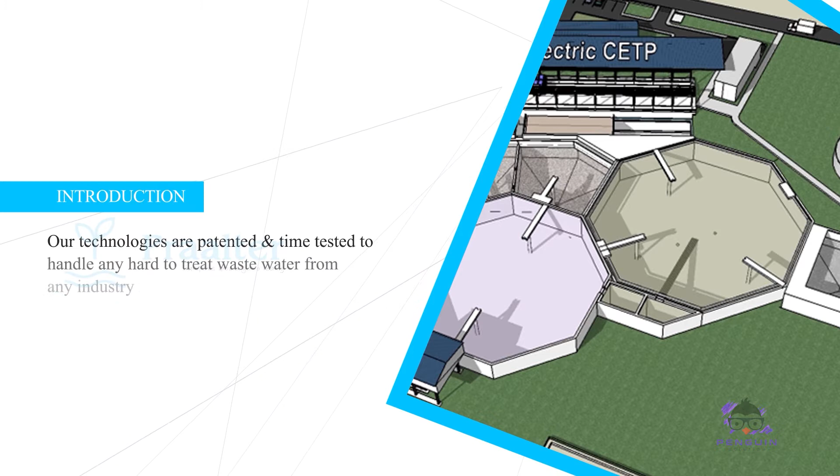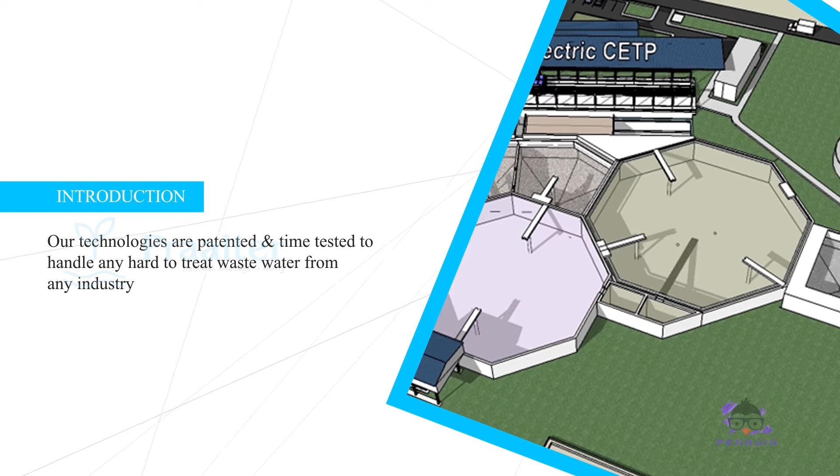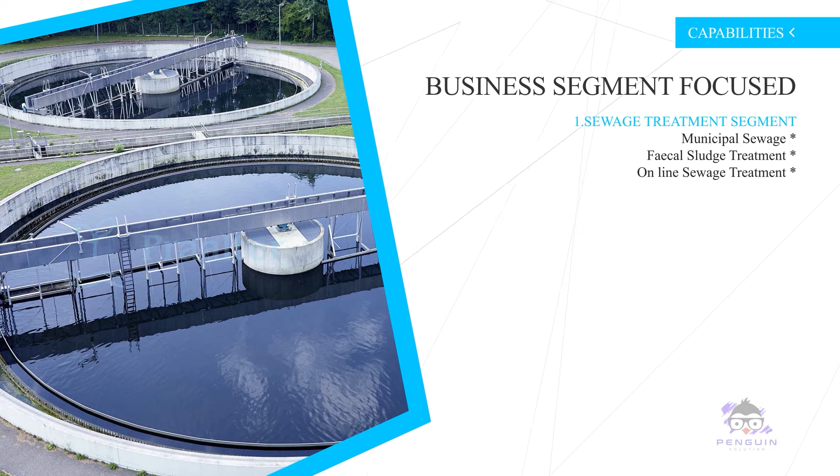To start with, we will be targeting our technology in three segments: one, municipal sewage treatment; two, industrial wastewater treatment; three, domestic water.

In municipal sewage treatment, besides the municipal sewage treatment facility mostly run by the government, in view of the capital expenditure and terrain constraints on the government in sewage networking, we anticipate more emphasis will be laid on FSSM septage management and online treatment. We are ready to meet such business opportunities.

We have experience and expertise in treating and recycling industrial wastewater, and have executed projects with capacity of 60 MLD elsewhere in other parts of the world, when associated with our technology partners.

Our expertise includes industries like textile, tannery, food, common domestic waste and industrial waste, food and beverage industry, chemical, oil and gas, and so on.

Electrocoagulation is a chemical-free process destabilizing the suspended solids, emulsified or dissolved contaminants in an aqueous medium, by introducing electrical current into the medium, which provides electromotive force causing the chemical reaction.

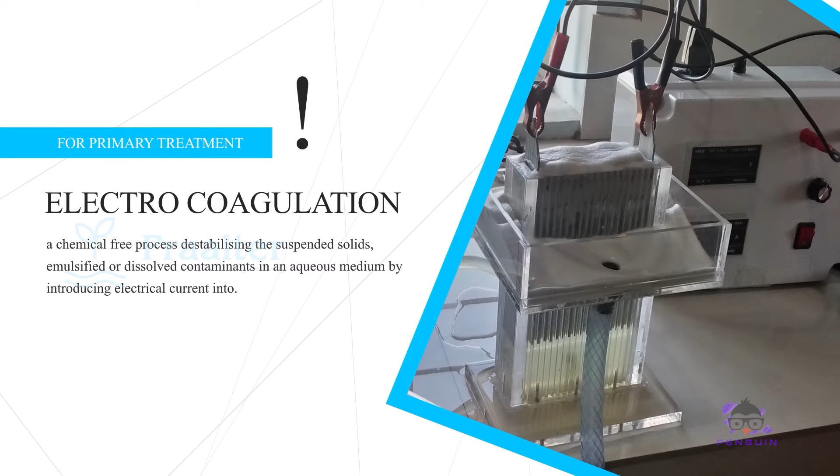It consists of three components: one, power source; two, reaction chamber; and three, electrodes.

When wastewater flows through the EC reactor, multiple reactions take place. First, on the surface of the anode, metal ions are driven into the water. Secondly, on the surface of the cathode, water hydrolyzes into hydrogen gas and hydroxyl groups. Third, electrons flow freely from cathode to anode, which destabilizes the suspended solids and emulsified oils.

As the reaction begins, metal ions complex with hydroxyl groups and form large flocs which consist of metal and other components. Suspended solids and emulsified oils are readily entrained into the floc because of their destabilized surface charges. Finally, hydrogen gas bubbles separate and lift the floc to the top of the reactor. This cooperative action makes the process easy, effective and efficient.

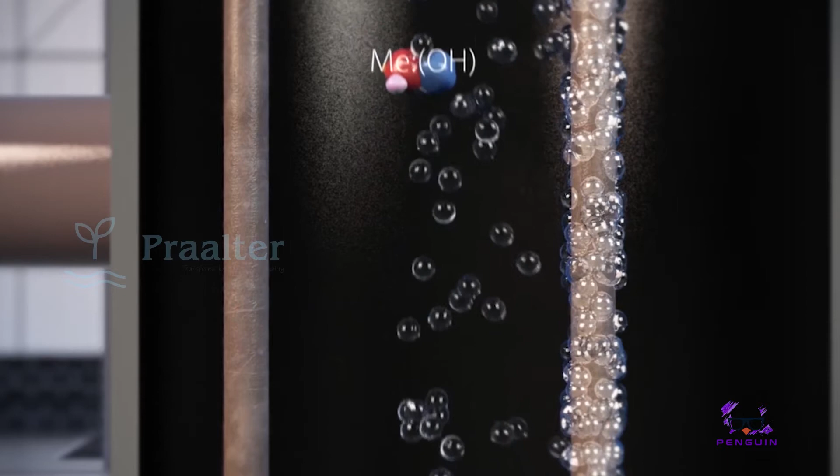As the water leaves the EC system, it enters the secondary separation tank. Here, the effect of the EC reaction is further accelerated. The floc generated in the EC system reacts with itself and forms larger flocs that settle out separately in the water column. Finally, the water leaving the settling tank is fed into a filtration system using silicon carbide membrane for ultrafiltration, and an RO membrane process as the design warrants.

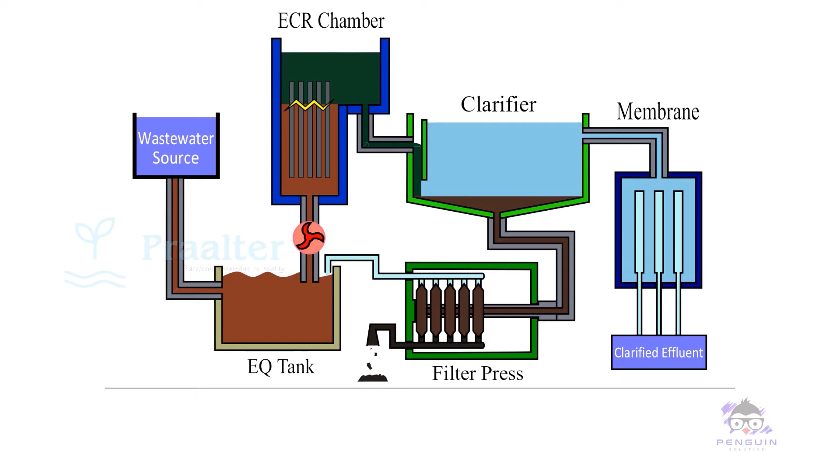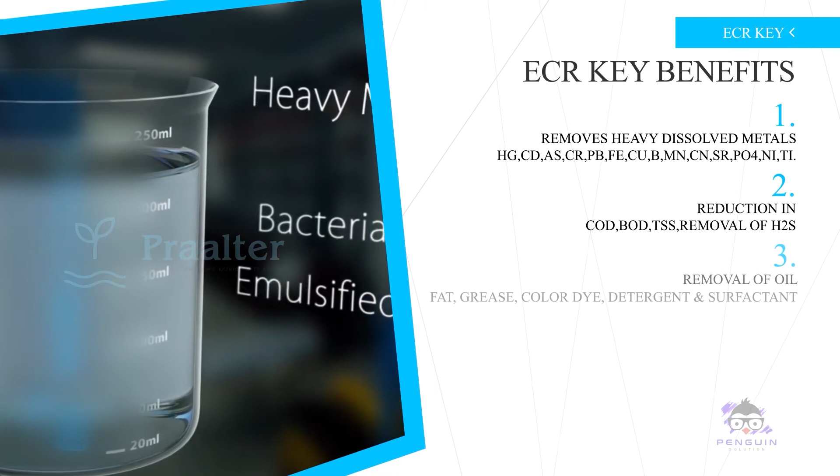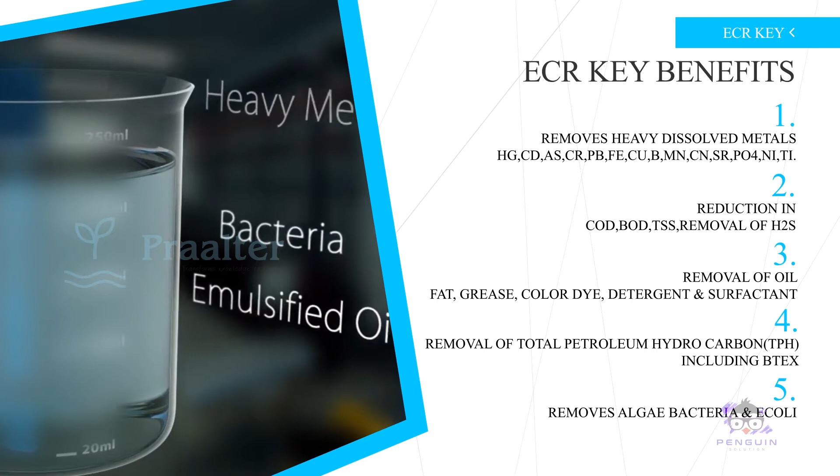The key benefits are: removes dissolved metals such as mercury, cadmium, arsenic, chromium, thallium, lead, iron, boron, copper, manganese, cyanide, etc. Reduction in BOD, COD, H2S and suspended solids.

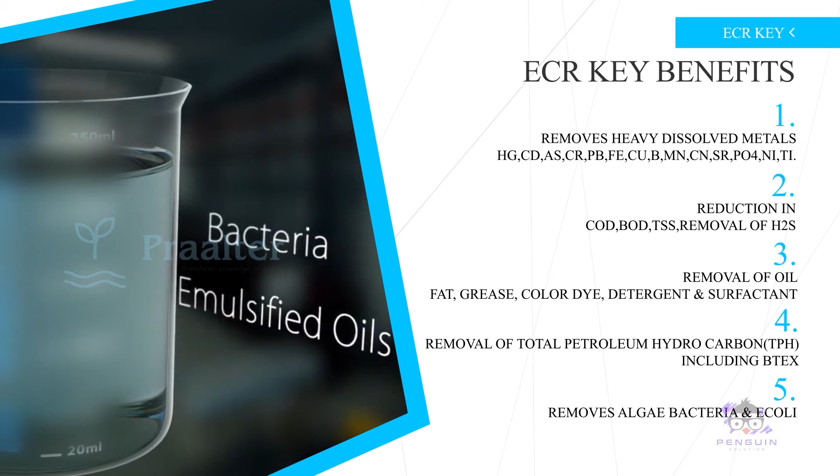Removes color dyes, detergent, surfactant. Removes total petroleum hydrocarbon. Removes bacteria, viruses, algae and E. coli.

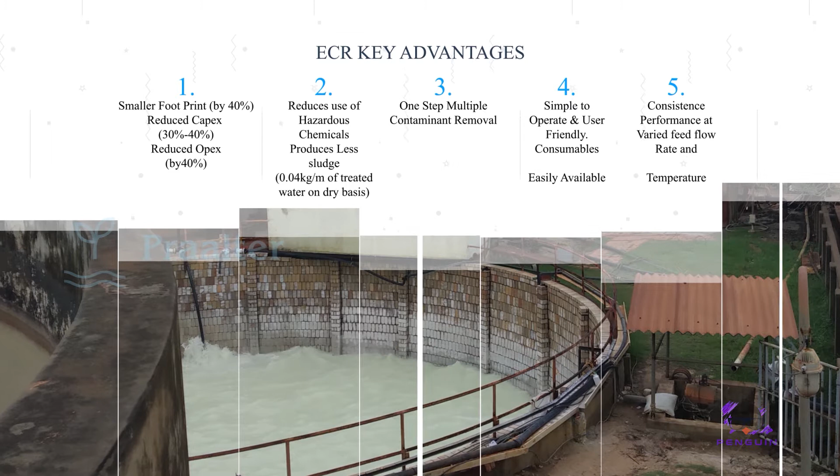Some of the key advantages are: one-step multi-contaminant removal, no hazardous chemicals are used. Reduced sludge at about 0.04 kg per cubic meter on dry basis. Reduced footprint to an extent of 40% as no large equipment is involved due to instant treatment reaction. Reduced operating cost of about 40%.

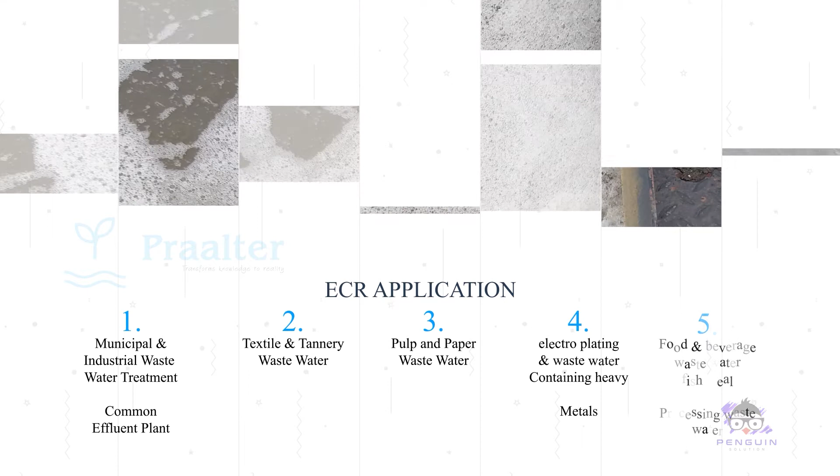The system is suited for applications in municipal and industrial wastewater, oil and gas produced water, mines process water, construction wastewater, power plant process water, and pre-treatment of seawater reverse osmosis treatment. Any difficult to treat water and waste, and recycling of water and wastewater.

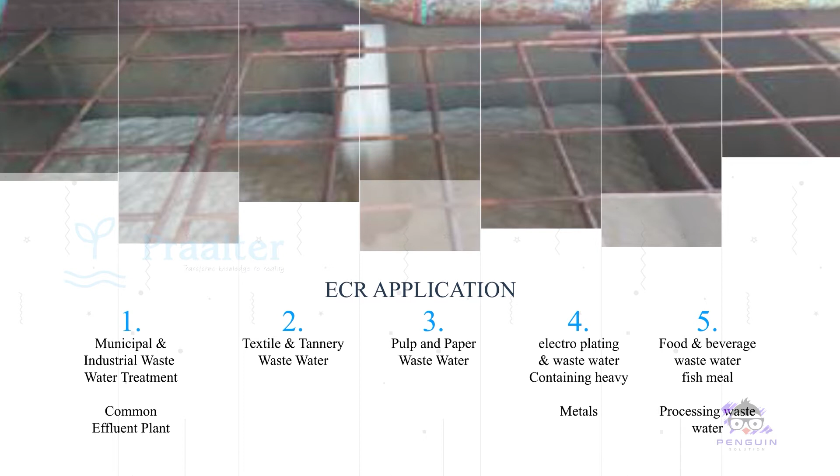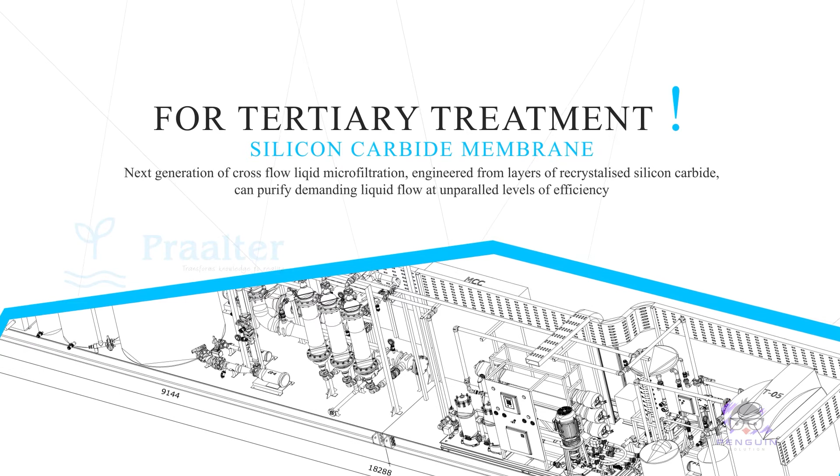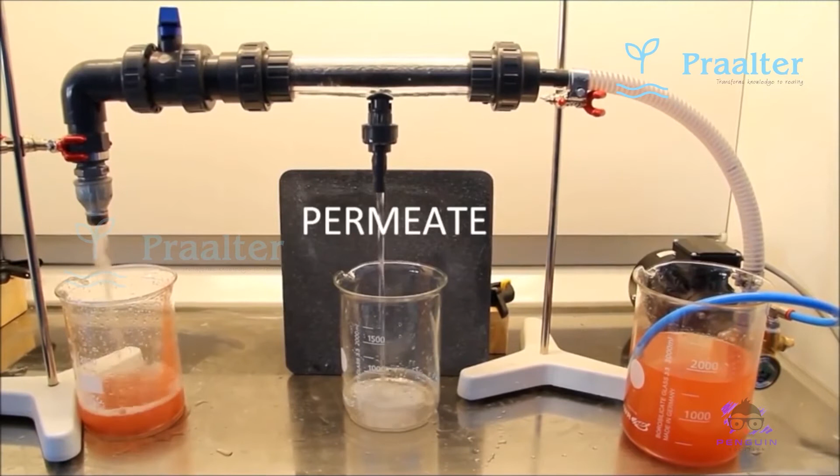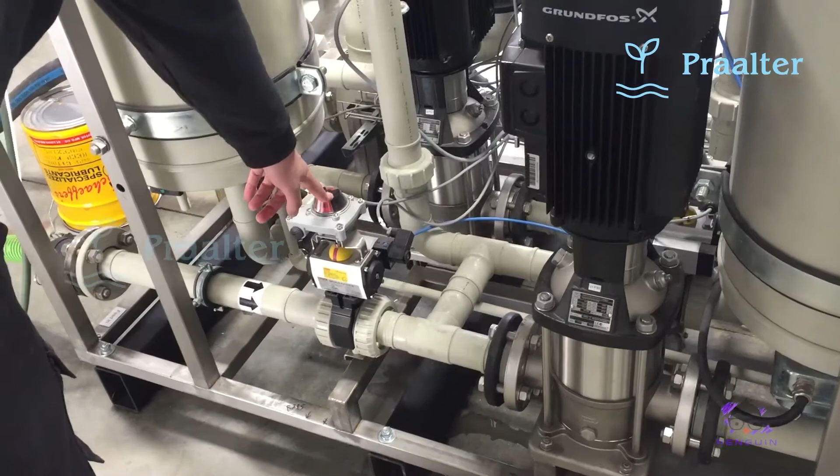Silicon carbide membrane filtration: the next generation of cross-flow liquid filtration, engineered from layers of recrystallized silicon carbide, can purify demanding liquid flow at unparalleled levels of efficiency.

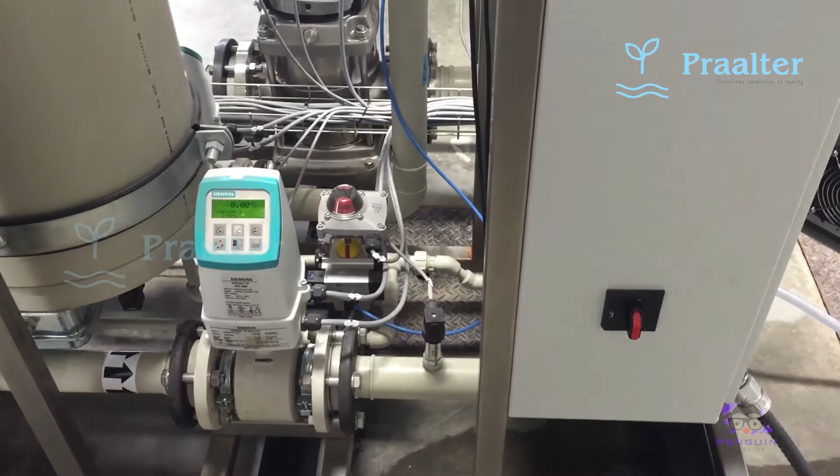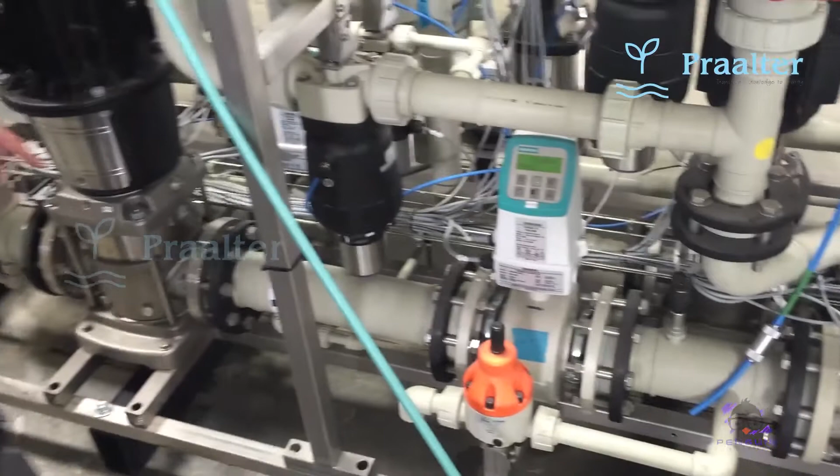The filtration system consists of tubular silicon carbide ultrafiltration (UF) membranes, where multitubular membranes are housed in pressure vessels. Backwashing of the UF membranes occurs when the transmembrane pressure (TMP) reaches an assigned set point. Backwashing utilizes water from the UF permeate tank through a pump to provide high-pressure fluid in the reverse direction through the membranes. RO membranes are used for further treatment in case TDS reduction is required.

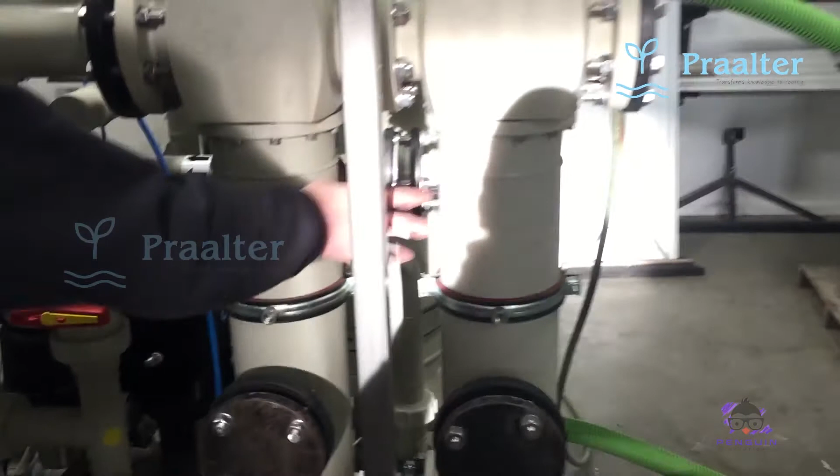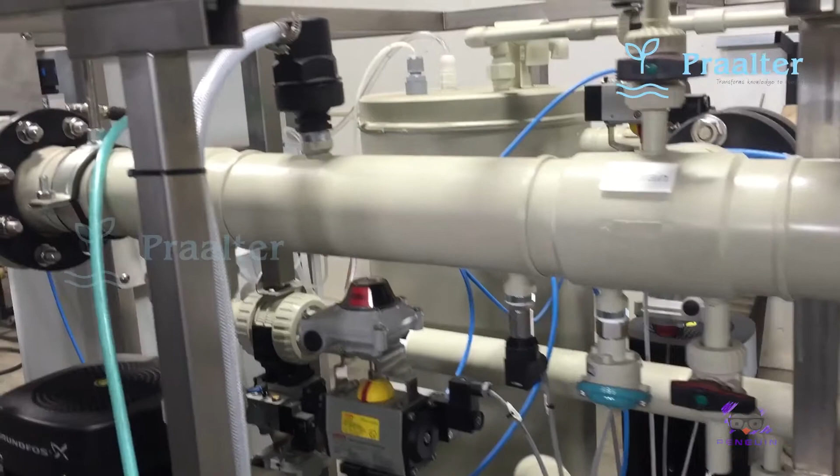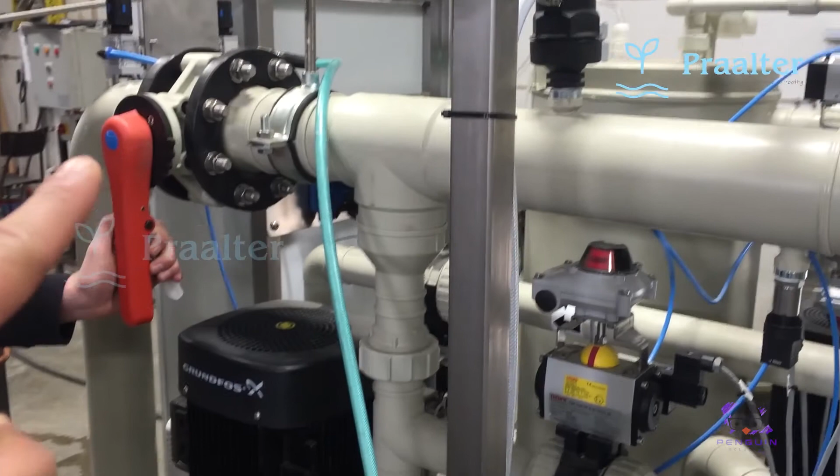That one will not be used when running in dead end mode. Then we have the two membranes here, and the feed comes in at the bottom and goes out. Then from this line here we have the retentate. When running in dead end mode, we want to have this valve closed. So we're running in dead end mode. To recap, the recirculation pump will not be turned on in dead end mode. So when you go into dead end mode, this valve is closed.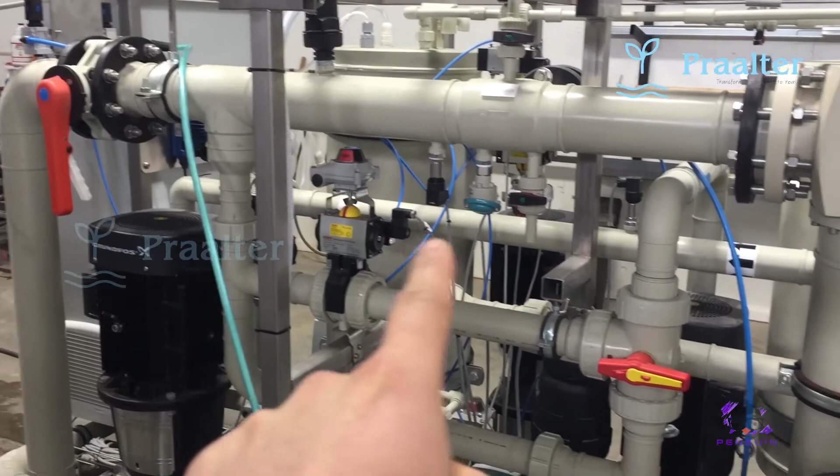And then we have here the retentate, but in dead end mode these valves here, like this one and this other one, the regulating valves, will be closed. So all feed that comes into the unit will be clean water. So basically, in dead end mode all the concentrate or retentate gets trapped right in that circle. Nothing's leaving because the recirculation valve is closed and that one is closed too. Everything gets trapped, so all the feed that comes in basically leaves as permeate, which is right on the side here. So the recovery is 100% in dead end mode.

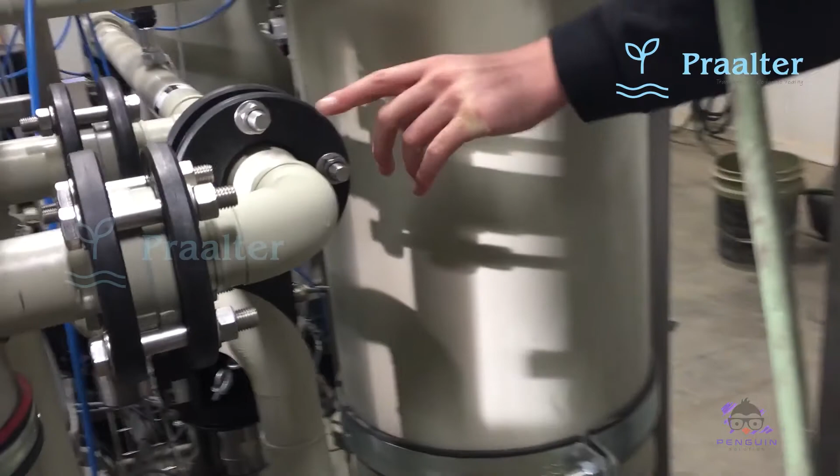Right, and it comes out here from the side of the membrane, goes all the way down here, on this side. So the permeate goes all the way here. Then we have the permeate pressure here, and we have a sampling valve here for the permeate.

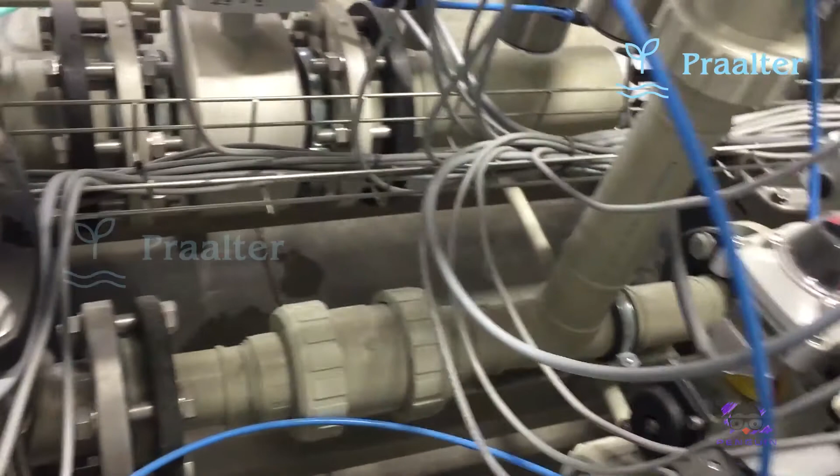And then it goes around here, through this valve that will be open — the permeate isolating valve over there, so it'll be open on and off. And then on the other side of this tank we have the permeate flow meter, right over there. And then the water will go up here — permeate clean water goes there.

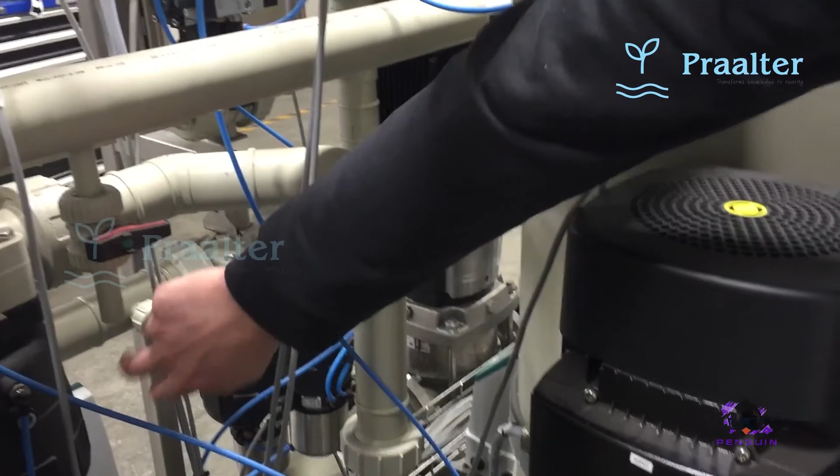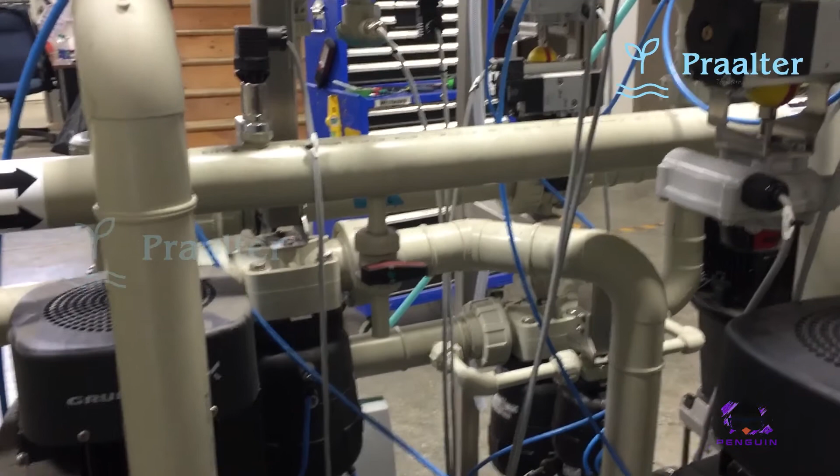Through this regulating valve — that's for back pressure only, correct? So will that be assigned? How do you know how much it should regulate? It will be in dead end mode, so it will regulate itself, to have a little bit of effect. But you don't have to input a value into the PLC? No, it'll regulate itself.

And then the permeate comes into this permeate tank here. The permeate will come in, then it will be running from the pipe here, so it comes down and into the bottom here.

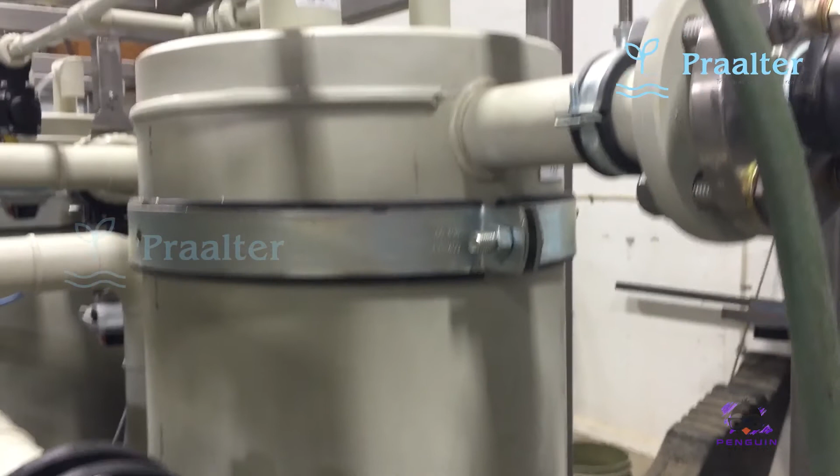So it comes from here, goes there, into the bottom and enters the permeate tank. Okay, cool. And we'll go out here and back.

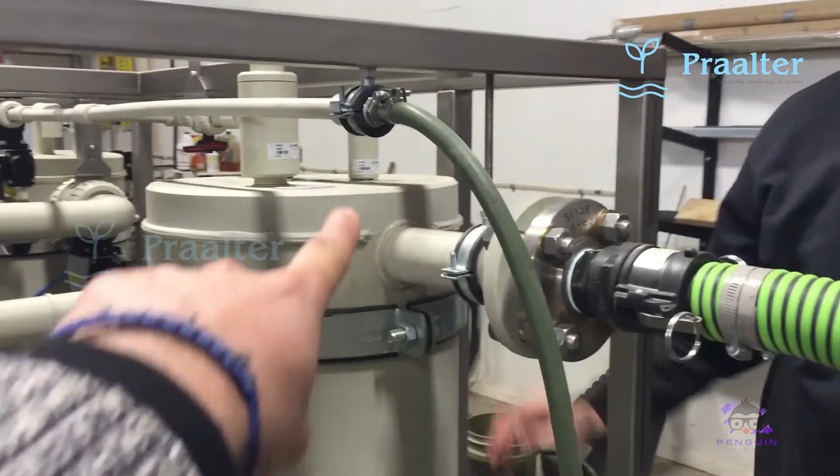Can you explain this again? These two just get the air out of the permeate tank. And the permeate tank we use when we're doing a backwash, cleaning backwash through the membrane, then getting it out on the concentrate line.

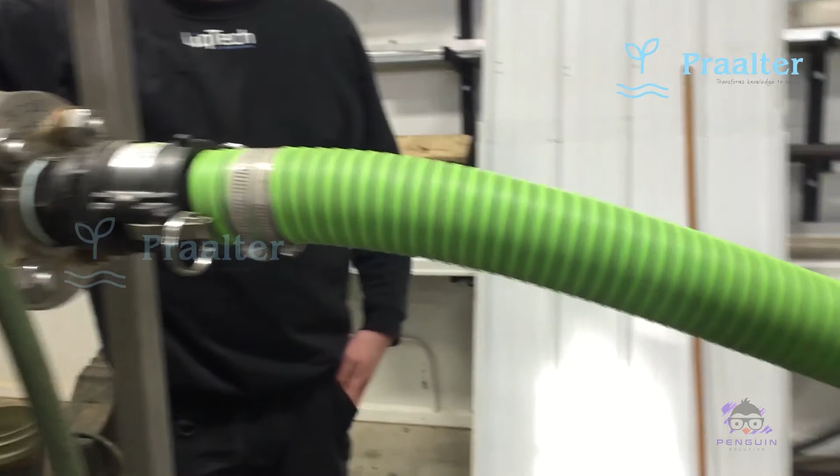So this is basically the permeate line. Now going back to this, the transmembrane pressure will be calculated from the feed pressure transmitter, the permeate transmitter, and the retentate/concentrate transmitter. So it uses these three transmitters to calculate the TMP, correct?

You take the feed pressure here, plus the retentate pressure, divided by two, minus the permeate pressure. That basically gives you the TMP right in the middle of the membrane.

This is the permeate line again. So when you're sampling, where would you sample the feed from? The feed sample is over here. This one. And then the permeate sample would be here - oh sorry, concentrate. The permeate sample is on the back.

So when you're doing a test, you typically sample all three, right? So you know the difference between what you're getting out. You want a feed sample before you start the test, then a permeate sample and a retentate sample. And this is just a pressure safety valve, assigned a specific pressure - if there's excess pressure in the system for any reason, this opens up.

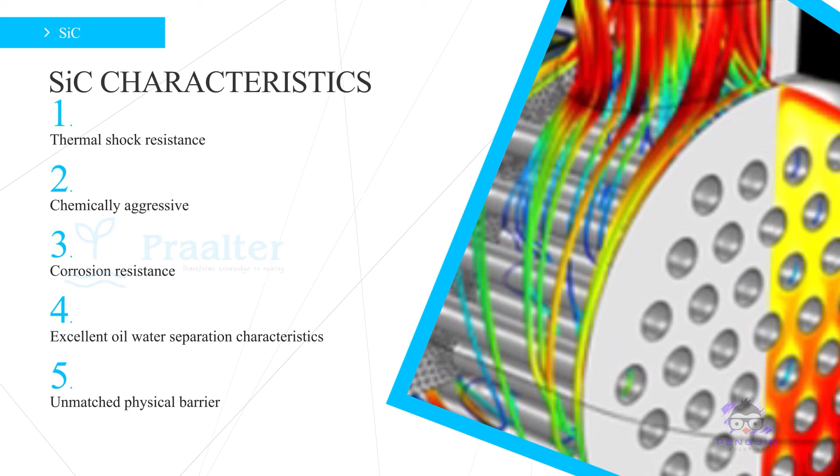The key characteristics of the SiC membranes are: thermal and chemical resistance, corrosion resistance, excellent oil-water separation characteristics, and an unmatched physical barrier preventing any suspended solids from passing through.

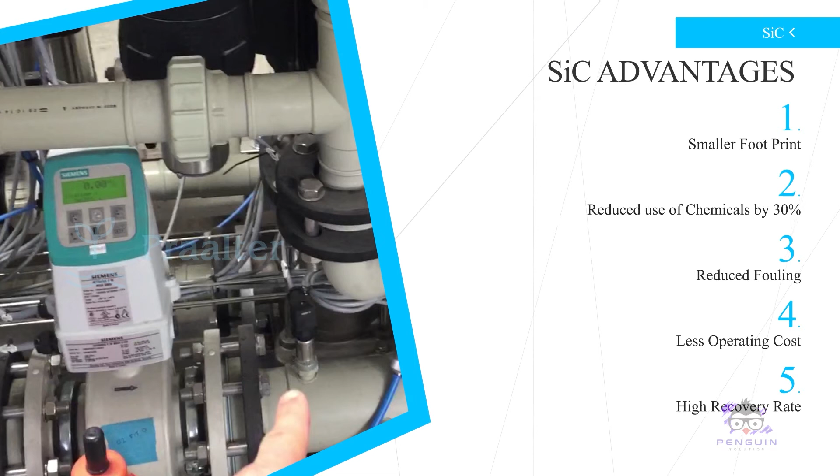The key advantage is that the system removes TSS, coagulated metals, bacteria, viruses, residual oil, and BTEX, with an estimated 95% permeate recovery and 5% concentrate reject, besides other operational advantages of 30% reduction in chemicals, 70% in backwash water, 20% in power, and 40% in turbidity.

In addition, it is automated, simple to operate, low maintenance, with a longer membrane life cycle of 15 to 20 years, and risk-free due to the high physical barrier of the membrane preventing any suspended and other contaminants from passing through the permeate.

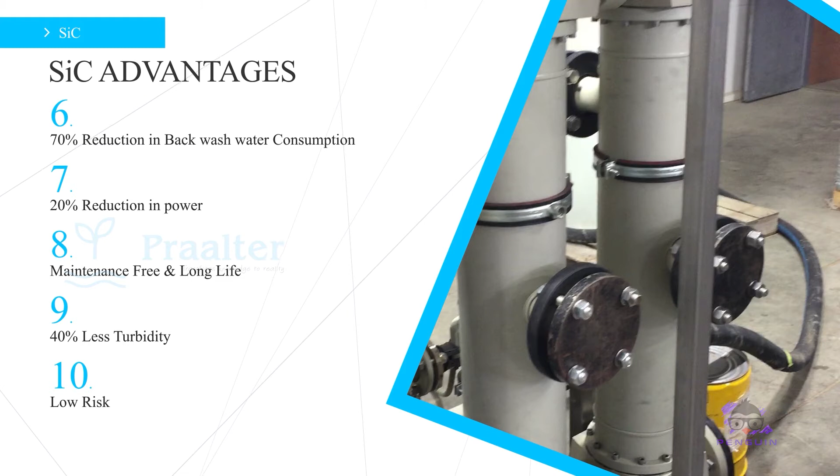Applications. The system is suited for: municipal and industrial wastewater, oil and gas produced water, mines process water, construction wastewater, power plant process water, pre-treatment of seawater reverse osmosis treatment, any difficult to treat water and waste, recycling of water and wastewater, and personal applications like swimming pools.

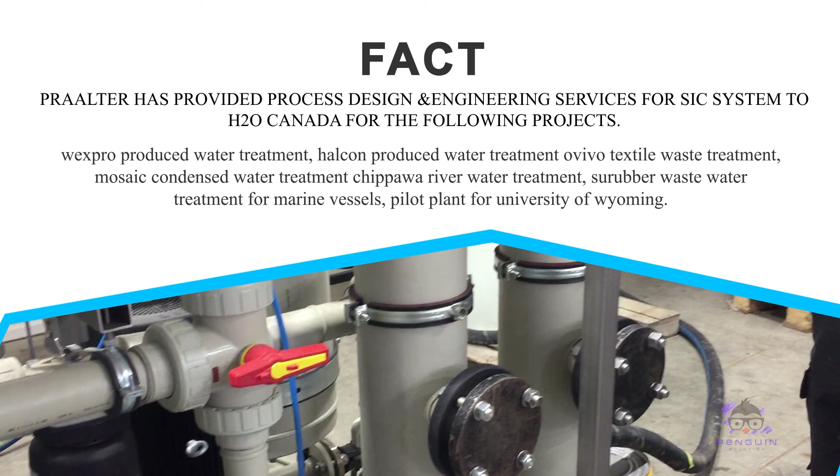Core team. Mr. Santhanam, whole-time Director and Chief Operating Officer, is an electrical engineer with 48 years of domestic and international experience at senior level management, bringing multidisciplinary experience from green venture, horizontal and vertical integration, and corporate strategy.

Dr. Shuva Rao, whole-time and Technical Director, is a doctorate in water and wastewater treatment science. She was part of ECR and SiC development with our technology partners. Her experience includes working with GE in their membrane business and training in South Korea in membrane technology. She has published and presented 10+ papers on advances in wastewater treatment, reuse and recycling, removal of contaminants, and urban water management. She is also a member of the American Water Works Association and a certified auditor in OSHA Environmental Risk Management.

Dr. Ing Srikanth, a research scientist in electrochemical energy, specializes in reversible energy storage using SOFC technology. He developed technology for the production of synthetic gas from sustainable resources, used as fuel for generation of green energy. He advises us on waste-to-energy business strategy.